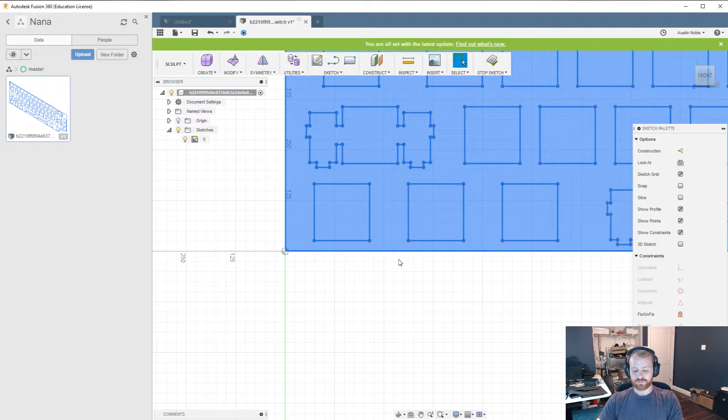One of the shortcuts I use a lot is pressing the S button, which lets you search for things. I'm going to use sketch scale. I already have everything selected that I want to scale, and then you just have to choose a point to base as your reference for the scale. We'll do 0.1 since everything was 10 times too big.

And we have a plate, so I'm just going to select that, copy, and go to my other design. Paste—those are just Control-C and Control-V in Fusion 360. At this point, I'm going to clean up the stab cutouts because they look like ass.

So usually I end up just drawing a rectangle around the cutouts that are already defined. Oh, I messed the other one up. All right. And then I delete the old geometry—don't need it anymore.

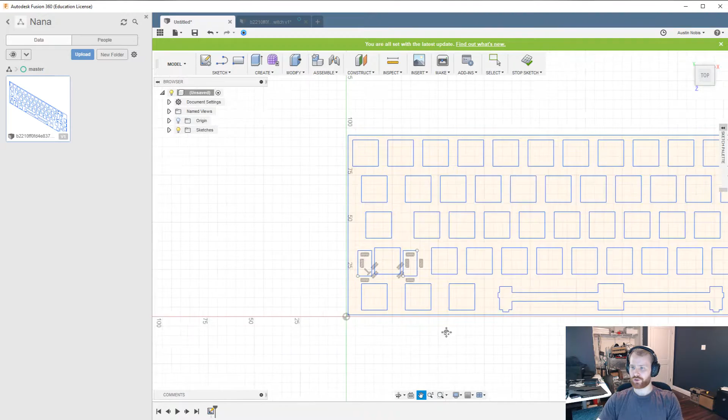Alright, so we've done one of the 2U stabs. Instead of doing the circles again over and over, I just delete the old stabs, make a nice box, and then I'm going to select these two.

Alright, so now we just need to move these stabs over to where they actually go. Keyboards are built on a 19.05 grid. So if we do 19.05 times—I can't remember how many keys exactly it is away—12, so just move it over until eventually you'll know. All right, so 12.75 units to the right, and then up we go 19.05 units up. And there we go, we have the stab cutout here.

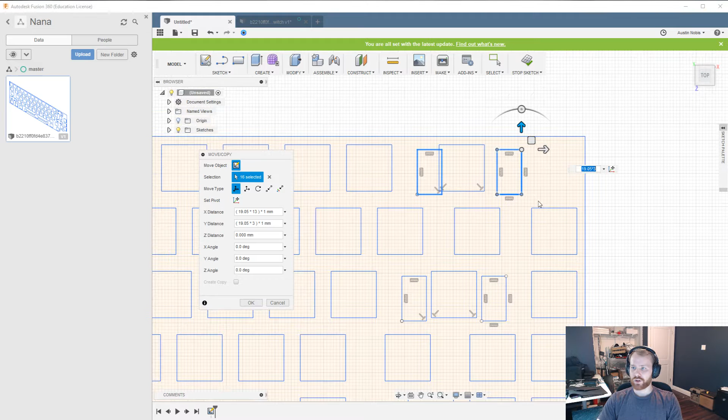All right, so now we have that stab. The next thing we want to do is add the switch cutouts for the split backspace.

So we'll copy paste and then we'll move one that way, and then the other one goes this way. And then I normally like to clean this up, so you just delete all the geometry you don't need. There, there, and then we just close it. Oh, missed one.

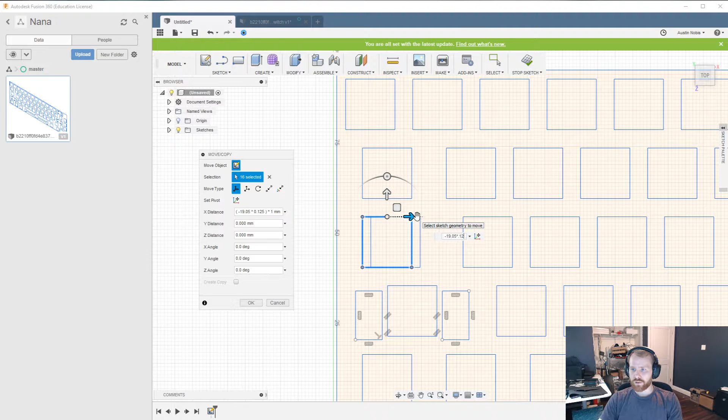So I'm pretty sure—go negative, and then there's the cutout for that. We'll delete the extra geometry again. What's up, Tonka Tonk? Just doing stepped caps lock right now.

All right, and then the last thing we'll do is we'll do the stab cutouts for the 7U spacebar. A little different from the other ones—we're gonna flip these upside down, so I'll show how I do that. Again, we'll just do the box outline, delete the extra stuff that we don't need, close off this box.

All right, so now we want to flip these upside down. For this, I usually use the mirror. So I select the geometry that I want to mirror—oh, let me close this stab actually. All right, so we'll do the mirror, we'll select, and then we'll select our mirror, which is the middle of the switch, to flip the stab upside down. And then we'll delete the old stab.

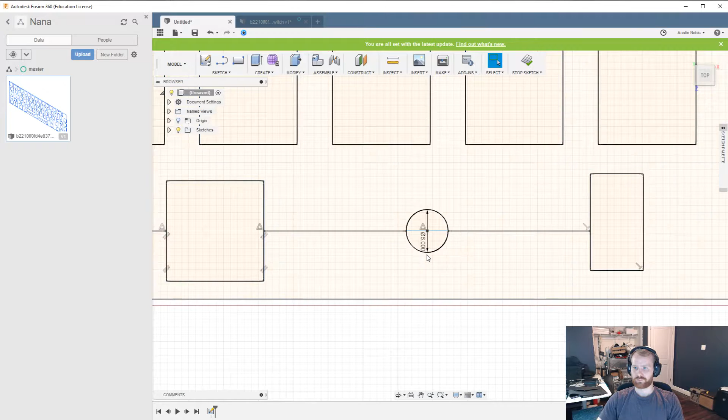Create a line again, and we're going to do the mirror again. So we'll select this, do the mirror, select the line for the mirror, and then that'll be duplicated across. All right, so this is going to be our plate.

So in between the edge of the case and the edge of the switches, all the switches are on a 19.05 grid, as I said earlier. So if you do an offset of minus 2.525 - I guess they changed that in the latest update - if you drag it this way and do 2.525, you'll see that it's in a perfect line with the edge of the switch plate generated by SwillKB.

So if you actually set the edge of your case to be on this line, you'll get a problem. You'll run into a problem when you get it manufactured where the edge of the keycaps will actually hit your case, which you don't want.

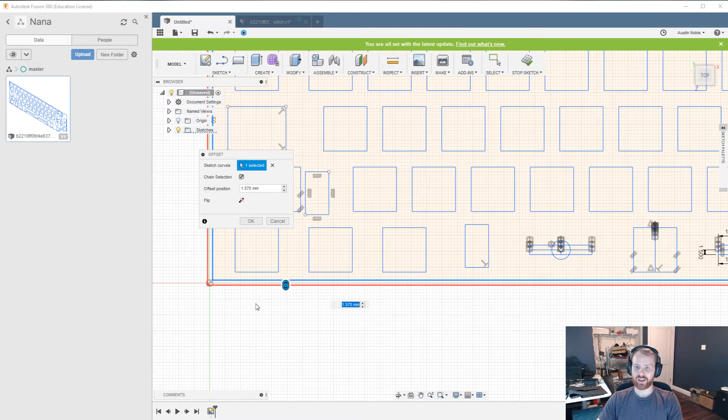So what I do is create some space using the offset tool. If you just press O, that's your offset. So you select that, and I do a 0.475. That's going to be the space between the keycap, like one switch unit, and the edge of the case. And then...

After that, we define the outside of our case. Bezel-wise, I usually do somewhere around 6 millimeters. So we'll do 6.475 - the 0.475 comes from the offset between the switch unit and the edge of the case. That'll give us a 6 millimeter bezel.

Another thing I need to add are the blockers for the switch. Like I showed you earlier with Q, which is this keyboard right here, there's a blocker here, there's a blocker down here, then there's a blocker over here. So we're going to replicate all of those in this drawing.

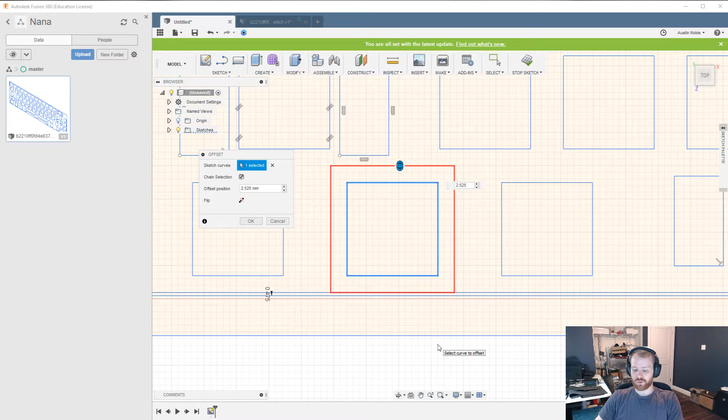All right, so to do that, like I said before, we're on a 19.05 by 19.05 grid. So we select the key that we want to block out, and then we go 2.525. Why 2.525 though? All right, so if we go to a calculator - we're on a 19.05 grid for each switch, so we do 19.05.

If you read the specification sheet for a Cherry MX switch - I'll just pull that up real quick, we'll reference this later too - and look at the size for a switch, it's 0.61 by 0.61, right? And if you go to the key switch metal frame cutout dimensions - metal frame meaning plate in this case - you have a 0.551. This is all in inches, so we need to convert to millimeters. So 0.551 inches to millimeters gives you basically 14 millimeters. So you're on a 19.05 grid, you have a 14 millimeter switch cutout.

Will you save this stream in your videos?

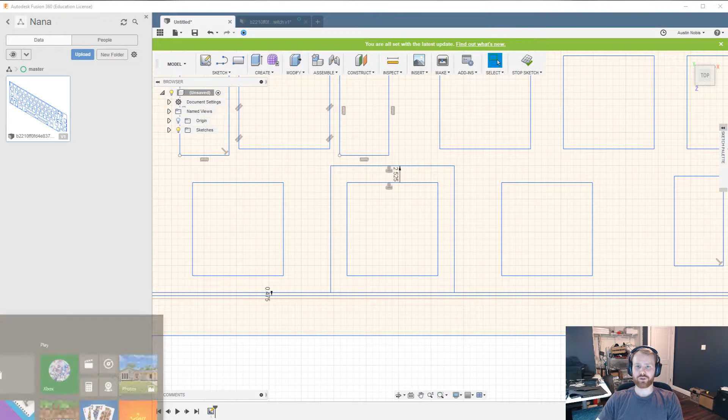Okay, so now we have that - that's one switch unit. Another dimension that we have is the size of a keycap. The size of a keycap is 18 millimeters. That's for a GMK keycap. I'm not sure about SA, and I think Enjoy PBT are actually a little bit smaller than GMK.

So if you do 18 minus 14 divided by 2, that's 2, right? So for my blocker, I want it to block the same exact size of a keycap, so I'll offset that by 2, which is this in here. And at this point, I'll delete the switch and that cutout, and then extend this blocker all the way down to the edge of the case, right?

So this is part of the case, this is part of the case. This right here is the space in between the edge of a switch unit and the edge of the case, so that your keycaps do not end up hitting your case. And then I'll just drag that down too. All right, so we have one blocker right here.

Next, we're going to do the blocker that goes in between your arrow key and your key just to the right of the spacebar. This will end up going exactly in the middle of these two, so it'll be centered off right here.

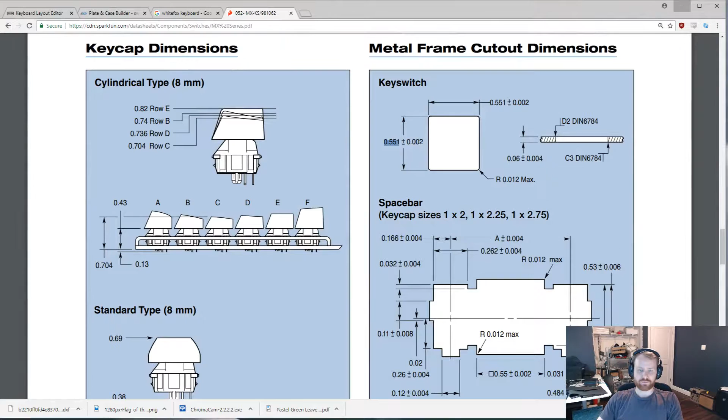If we look at the keyboard layout design we did earlier for the KLE layout, if you move this over 2, you know that it's 2 units, right?

A full unit is 19.05. So the size of this blocker is going to be 19.05 divided by 2, which is 9.525. And for the actual size, we want it to be the size of a keycap divided by 2, which is just 9. So the size of this blocker will be 9.

So starting at the center, we'll go up, and the height will be 18 for the size of a keycap. Just do a line straight up, 18. And then each way we'll go 9 divided by 2 that way, and we'll do 9 divided by 2 again that way, which is 4.5.

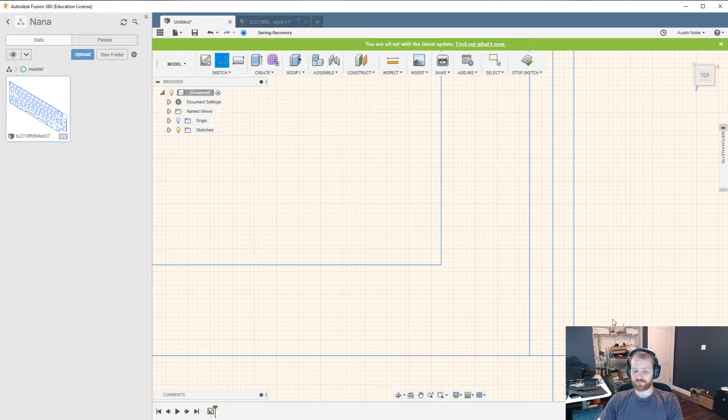And then the last thing we need to do is the blocker in the top right corner. So we'll do a copy paste. We'll go up 19.05 units for the size of a switch. We'll offset that by 2 because the size of our keycap is 18. We'll extend that to the case. And there we go. That is our plate.

I'm going to go in and delete these because they're confusing, and then just close this again. All right, so let's save.

And at this point, we can extrude. So usually the first two things that I extrude are the top of the case. So we'll select that, which is our outer bezel, and we'll select the blockers that we created.

Oh, so I made a mistake. I didn't extend this blocker all the way to the edge of the case, but we can fix that really quick. So we'll get this blocker for the top right, and then we'll get this last blocker right here.

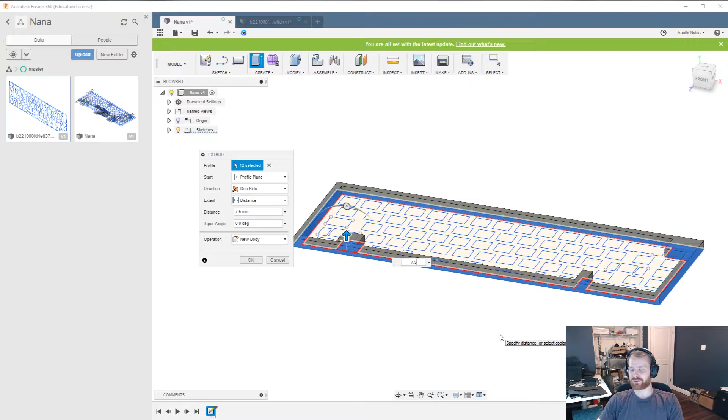So for the height of the top of the case, I like to do 7.5 millimeters. With 7 millimeters, you can kind of see under the keycaps. I don't really like seeing under the keycaps in my designs, so I go with 7.5 millimeters. That'll cover the bottom of the keycaps and give you a nice look, in my opinion.

Sometimes Fusion is really annoying, and for some reason there's some extremely small portion that doesn't extrude properly. One way to fix this is you go back in your history, scroll in, and find that little section that didn't extrude properly. You click on that and zoom back out. And there we go, we have the full top of the case.

So the next thing to do is to create the bottom of the case. I create a sketch from the side of the case right here, and then I just draw a giant square, like 50.

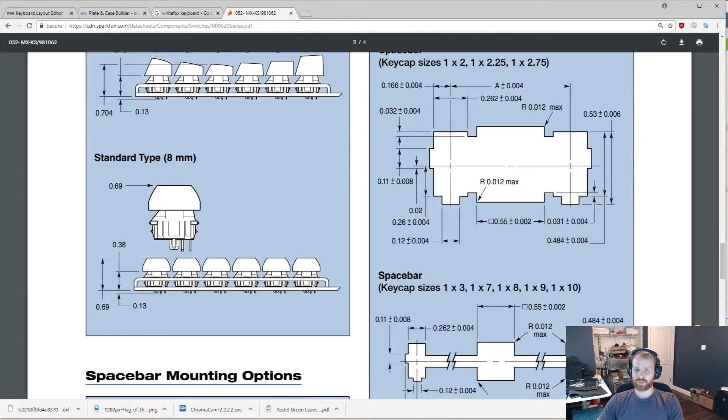And then you need to decide the amount of space that you need for the bottom of the case. To figure out how much space you need underneath the case, underneath this, right here, you have your plate. Your plate is usually 1.5 millimeters thick, or at least it will be in this design. So your plate's going to be 1.5 millimeters. And then underneath your plate, you can read the Cherry spec sheet and deduce how much space you need underneath your plate for the PCB, etc. So if you look here, you see from the top of your switch plate to the top of your PCB, you need 0.197 millimeters.

Or rather 0.197 inches. So 0.197 inches to millimeters. All right, Google. So that's 5 millimeters. And then what's the thickness of a PCB? Usually for keyboards, the thickness of a PCB is 1.6 millimeters. So 1.6 plus 5 is 6.6 millimeters.

But you'll notice if you've bought a PCB in the past that the little legs on the bottom of the switch - I don't know if you'll be able to see this, but it'll be easier if I just pull up what a switch looks like - these little legs, if you actually put those into a PCB, you'll notice they stick out a little bit from the bottom, so you need a little more space than just 6.6 millimeters.

So for safety, you could do something like 7 millimeters or something like that. So underneath, from the top of the plate, which is right here, you'll need about 7.5 millimeters or so. You can probably get away with 7 - I've done that in a few designs, but it gets a little tight, so I would recommend doing 7.5.

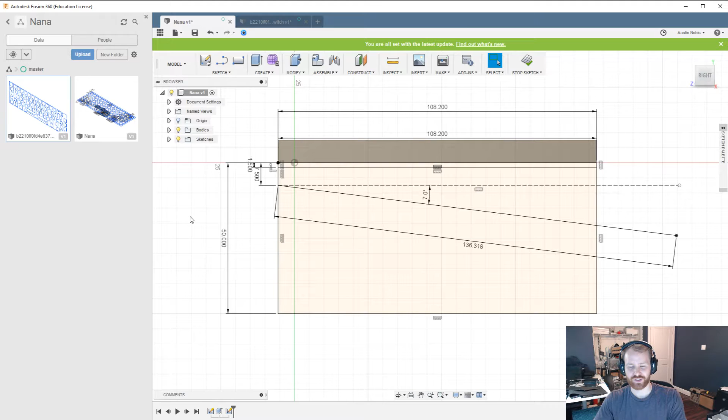Also, no, I'm not doing 11. The keyboard's called Nana, which means 7 in Japanese, so we will do 7. Yes. It's been decided.

So, something I'm going to change from the sketch I did earlier, or the first extrusion that created the top of the case, like this part. Something I didn't account for when creating this is that I want this keyboard design to actually be top mount, right? So the edges of the case need to go around the plate.

So to do that, we need to take our 7.5 millimeters, which will cover the bottom of the keycaps. So 7.5 from the top of the plate to the top of the case will cover the bottom of the keycaps, but what it won't cover is the plate. So the plate is another 1.5 millimeters, right? So you want the plate to sit somewhere in here, but you can't do just 1.5 millimeters, because you also want to cover the screws that screw the plate into the top of the case.

That'll make a little more sense later, but one thing you can do is go on Amazon and look at an M3 screw. Sorry, what are they called? A head cap. And we'll just do like 5 millimeters or something. And you'll see a screw like this, right? So just looking at this, a little piece of the screw is going to stick out.

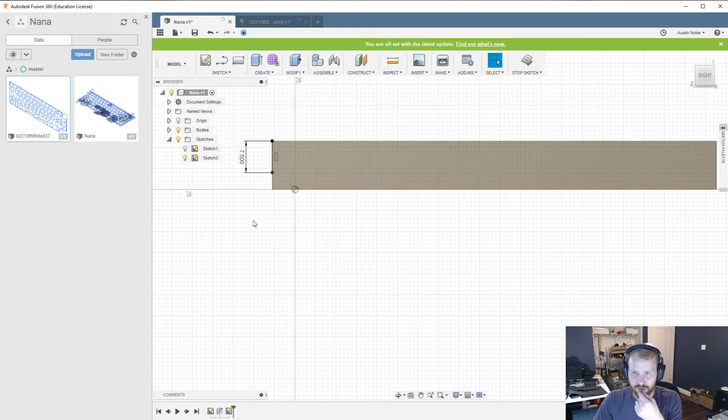All right, now we have that. We'll delete this sketch from earlier since it's in the wrong place. Now we can do the actual bottom of the case. If you remember earlier, we have the 7.5 for the top of the case, and then from here, we need another 7.5 millimeters, if you remember my talk earlier about the space you need for the PCB to fit underneath. And then from there, you can angle.

I said the angle would be 7 degrees. And then we just draw a line straight down, and there we go. So this is going to end up being the bottom of our case. Actually, one sec. So 7.5 is the space you need. Usually you want to make it a little bigger, because if you make it just 7.5, then the PCB will be flush with the bottom of the case and there won't be any space in between.

All right, so now we'll extrude that, and we'll just extrude it all the way. I used to use To Object a lot, but that doesn't seem to work anymore. It actually gets kind of annoying. So the lazy way is to just extrude it too far. We want it to be a new body, right?

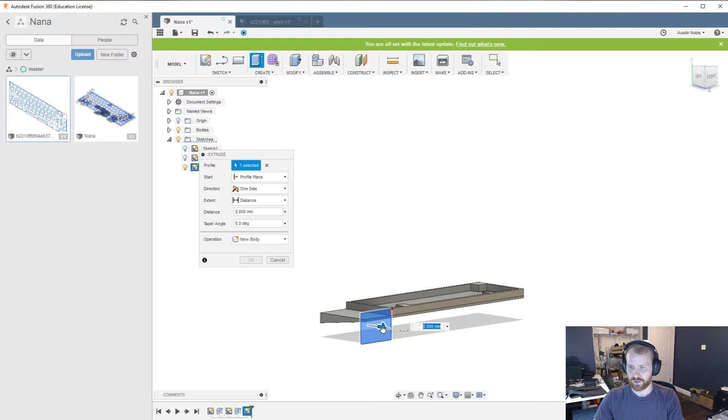And then we can just create a sketch on this face, do a rectangle, encapsulate this area, and just delete it. Boom. Nice. We have our beautiful boxy keyboard. It looks just like an X60. I mean, no, just kidding.

All right, so the next thing, Mr. Kim. Who's Mr. Kim?

The next thing we want to do is we want to cut out a chunk from the bottom of the case for the PCB to fit into, right? So we'll go to our bodies, we'll hide our top. I'm going to name these real quick. Gets a little easier when you start hiding things.

NK is streaming too? Damn, are we competing? Who has more viewers? I bet he has more viewers. I'm gonna go yell at him for stealing my stream time. Yeah, my beard's not really that trimmed, so I guess it's all right.

It's been better. Yeah, so getting back to it, let's make room in the bottom of the case.

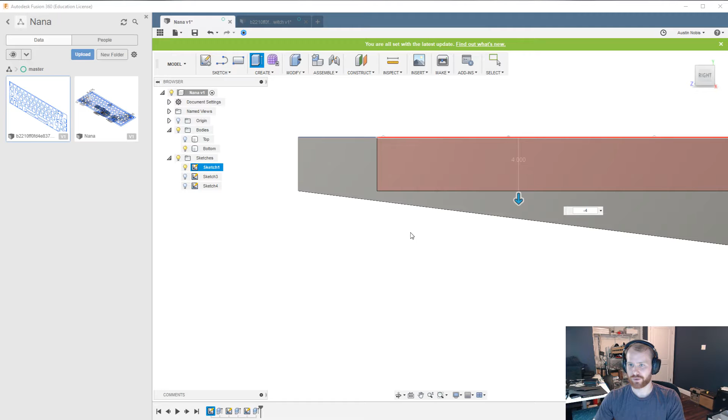So we'll extrude this way to cut space out. We obviously don't want to cut out the bottom of the case so we can't see anything. So we'll do a -4.5. That might be a little close. We'll do a -4. All right, so now we have a space cut out of the bottom of the case, and that's where the PCB will sit. Let's go clean up the top of our case.

Who's North Korea? I don't know. Who's South Korea?

So if you remember back to, well, you don't have to remember, I'll show you this sketch right here. So 7.5 is from the top of the plate to the top of the case. So basically from this point upward, we want to cut out of all the blockers so that the plate has somewhere to sit.

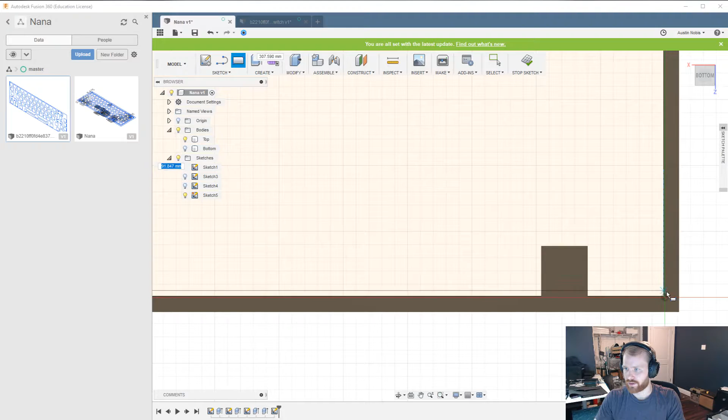All right, so let's go back to that sketch I just started, or didn't start. We'll create a sketch here. We'll create a rectangle that basically captures all of the blockers, right? So we want to remove everything but 7.5 millimeters. So if you measure this, you see 11.5 millimeters, and you want to cut out the 4 millimeters that are extra, right? So we'll do a -4, and we'll cut those away.

So basically our plate will sit up right here, and the PCB will sit underneath the plate. So if we measure this distance from here to here, we have 8 millimeters. Remember what I said earlier, you want somewhere around 7.5. If we want to make it exactly 7.5, we can just change that extrusion we did to cut out this chunk from the bottom of the case. So if you just double click on that in the timeline, I can just make it -3.5 instead of -4. And then if we do that measurement, there we go, 7.5 millimeters, exactly what we want.

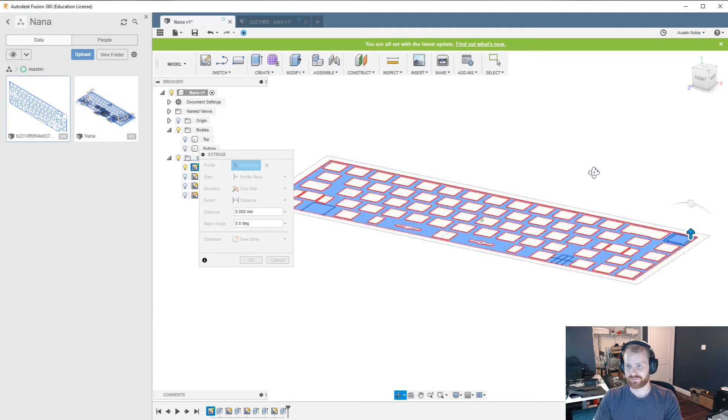All right, next let's create the plate. So we'll go back to our beginning sketch right here, and we'll just extrude all of this goodness for the plate. So our plate thickness is going to be 1.5 millimeters. Right now we have a little bit of space in between the plate and the blocker, 2.5. So what we can do is, let me rename this to plate real quick, and we'll just do a move. To move, you can just press M, and we'll just go up. What was it, 2.5? I think that was right. So yeah. Now you have your plate right up against the top of the case.

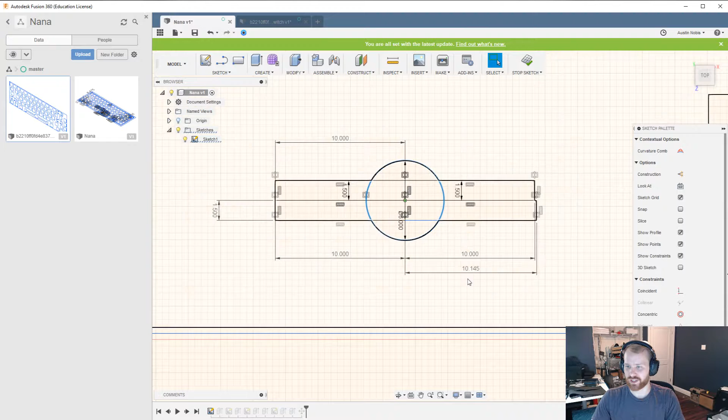Yeah, the relief cutouts are kind of ugly, so we can do a fillet. What happened there? That's hideous. All right. I'm gonna go back and fix this relief cutout because it looks terrible. I probably just messed up one of the dimensions, to be honest. So if I distance that, 10. Okay, this one is not 10. So I'll just change that to 10. What happened there was it actually pulled all the other geometry, which is kind of annoying. So what we can do is we can fix this circle. Then this is ground, it can't be moved by anything. And if we make that 10 again, it'll actually pull it in that way.

So we'll do the same thing over here and fix that shitty stab cutout. Actually, we don't have to fix it over here because the geometry was mirrored. So if I fix it on one side, it'll fix it on both sides. So we can just do stop sketch, and it will replay all of the history. If I go back and edit this sketch here, it'll redo all of these steps based off the change I made.

Who's kind of annoying, Amnesia? Mods. You're right, we should have a mod. Let's see. Zek. How do I make someone a mod? There you go. Zek, you're a mod. Good luck. Be a good boy.

Alright, let's fillet this. We'll fillet there. And there, and there, and there. There, and there.

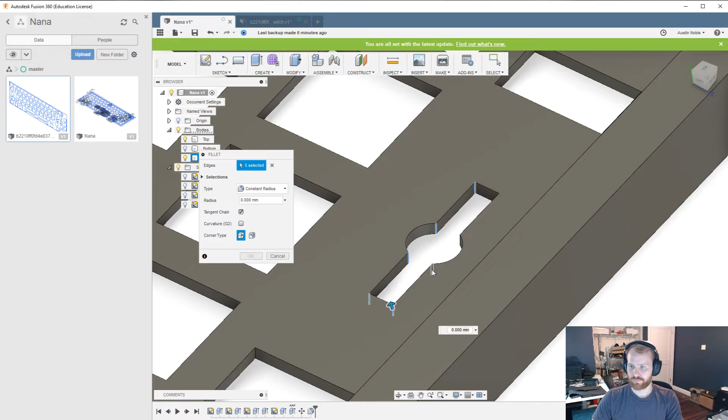And we'll fillet by 1. That looks kind of ugly. Bigger, 1.5, and you get a nice round relief cut. Yeah, I don't know. You can make them look however you want. It's not that big of a deal. And there we go. We have some nice corner relief cuts.

So another thing, oh, okay, I guess it didn't happen. So if you see this green point in the middle, that's your reference point for where you orbit. So if you set the orbit center over here, sometimes when you orbit, it doesn't orbit the way you think it will. So what you can do is just reset the orbit center, and it'll set it to the center of your geometry. All right, so let's go back.

So we have our relief cutouts. Let's make this thing less boxy. Fillet. So let's round the outer corners. This is really a preference. It's up to how you want to design it. So you could do 2 millimeters, you could do 4, you could do 6, you could do 8. It's really up to you. For this one, let's just do 4.

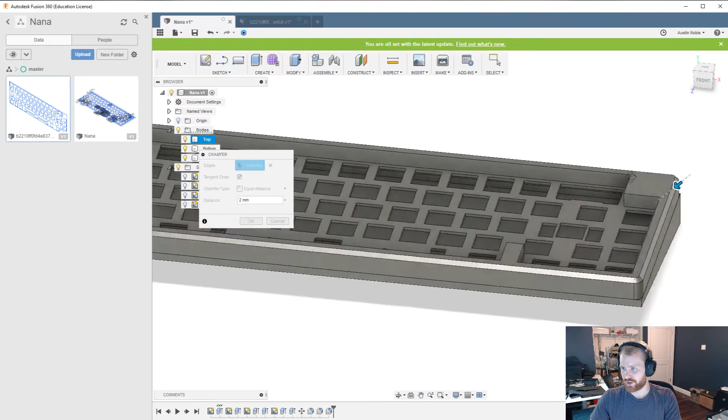And then another thing is chamfer. So once you round the corners, you can create a chamfer, and you just get that nice look. And you try and avoid having a lot of sharp corners on your design, right? So there you go. You have a chamfer, you have rounded corners. Now let's do the inside. So we'll do another fillet. We'll select where we want to fillet. There, there, there. Basically all the inside corners of the top of the case we will fillet. A few more to click, and I think that's all of them.

And then we'll do a chamfer on the inside, 0.5. So one thing that tells you if you've actually filleted all of your corners properly: if you do a chamfer, then it'll highlight the entire inside edge. And if it's all highlighted, that's how you know that all of your corners were filleted properly. So then we have 0.5.

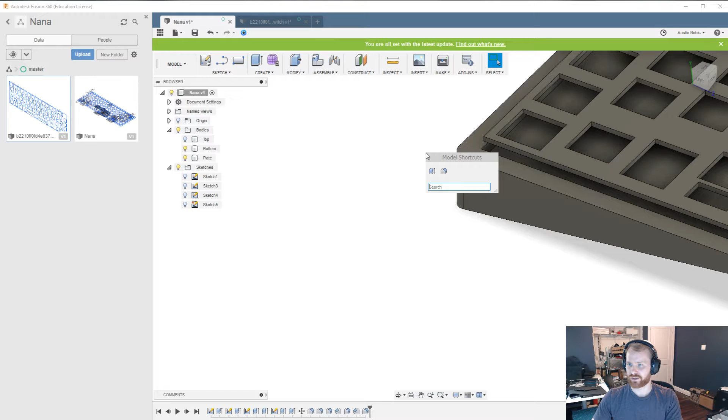And then obviously we want the rounded edges of the top of the case to match the bottom of the case. So we'll do the fillet again. And if you recall, those were also 4 millimeters. So we'll do the 4 millimeters and they line up. Great. So we rounded these inside corners on the top of the case. We'll also round those on the plate. So we'll do that fillet again. We'll go to the 4 corners of the plate. One millimeter, right? And then the last thing we need to do is the bottom.

All right, so now we're filleted all the way through and everything should be, yep, you can see it. And then this is the space between the plate and the edge of the case. Koala bottom. No koala bottom for this one. All right.

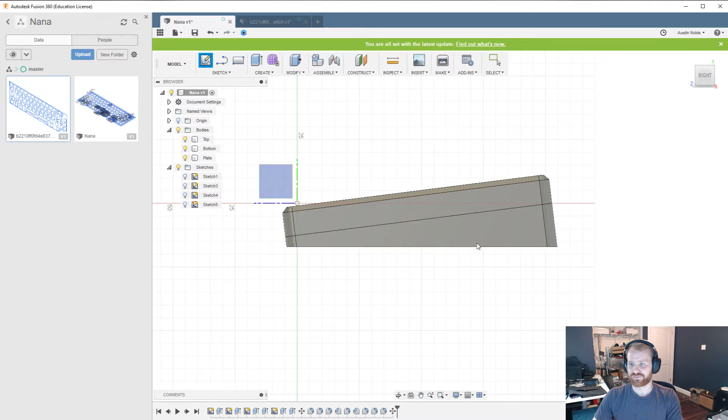So at this point, I'll design the bottom of the case. I guess this is a sneak peek since I haven't really told anyone how I'm going to design this for the Nana. So if you remember from earlier, the angle of our case was 7 degrees. So when I work on the bottom of the case, I like the bottom to be flat against the plane that I'm working off of. So I just rotate everything 7 degrees, like that. And then I'll sketch here.

So on this design, I think I'm going to cut in this way, so I'll just show you. But some data points I need to do this are this line right here. Because if I cut the case in this way, and I'll just show an example of what I don't want to happen. So if I offset this by 1, and we just go straight down, and I extrude this geometry, and we go in sideways like this. You don't want your case to look like this, right? You don't want that to happen. That looks like shit. Looks ridiculous.

So what you want to do is you take this reference point, which is the bottom of the inside of the case, and you go down, right? Let's go down like 0.5 millimeters or so.

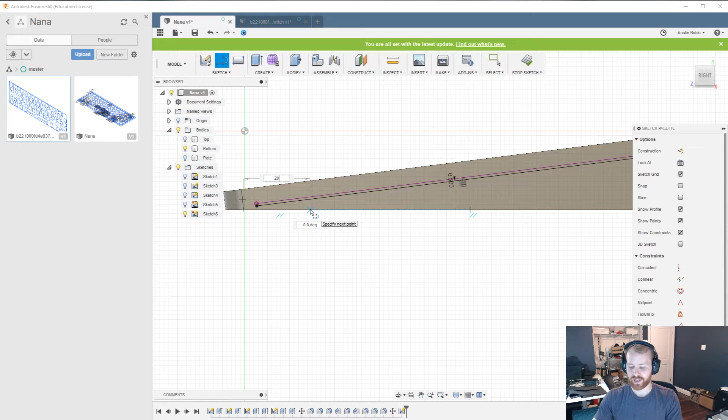So for this design, I want it to come in a bit this way, maybe like 20 millimeters. And then I just want it to go up and just follow the angle of the case. And the angle of the case is 7 degrees, right? So we'll just do 7.

So I know I made these filleted earlier, but they're kind of annoying when I'm trying to redesign the bottom of the case. So for now, I'm just going to delete them. So yeah, we have this portion that I want to cut out from the bottom. So I'm just going to extrude this in, let's say like -20, right?

And then another thing I want to do is I want to pull this in as well, right? So there's space here. That actually looks a little too big. I'm going to change that. Let's do 10. Yeah, 10 is good. So I want some space here, but I also want space here. So we'll do another sketch, we'll project this geometry, and then we'll just offset it.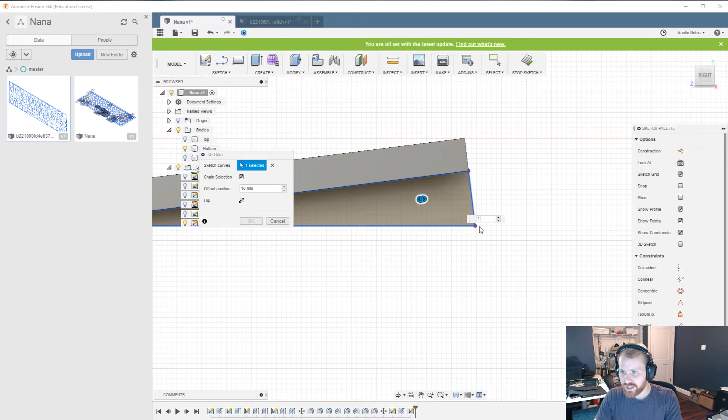Let's see, 10, no, 10's too far. I just want to offset this line. So to just offset the line, you can just click the line, and we'll offset that. We'll see how 5 looks. I think 5 should be good. And we'll just cut this one out all the way through, right? So now yeah.

I think it might look better if they both match. So we'll just make this 10, and if it looks ridiculous, we can always make the other one smaller and meet in the middle. Yeah, that's probably a little too big for my taste, so we'll just do 7.5. And then for this portion, we'll just go in 7.5. So then if you go look here, it should be 7.5 from both places. So if I go and do a sketch on this lip, and I go this way, it'll be 7.5. If I go this way, it'll be 7.5.

And my cat is meowing at me. Great.

So we'll create a sketch on the other side to do the cutout. We can actually copy the sketch we did earlier so we don't have to redraw it, and we can just extrude that, and we'll do another minus 7.5.

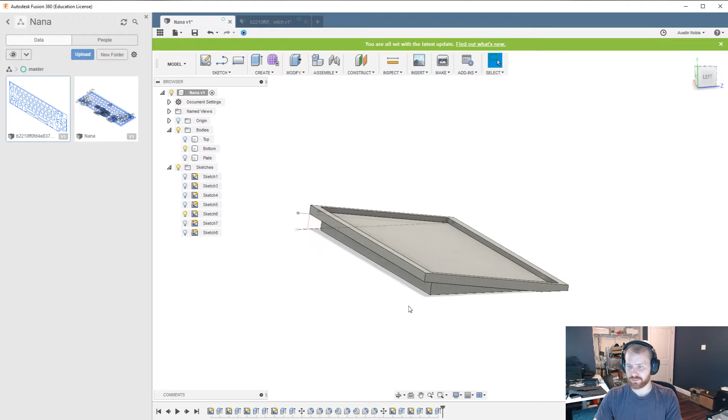That is a cat, not a human.

How thick is the space between the inside corner at the bottom and the inside corner in the tray? You mean the space from this point to this point? Is that what you're asking, Amnesia? Yeah? So that's 3.336 millimeters. No, it's pretty big.

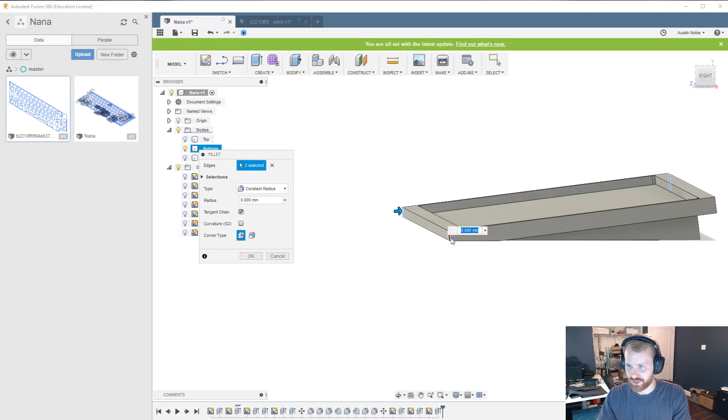Show cat. All right, I will show cat. This is cat. All right. I guess she wants to get out of the room. No, get out. All right, she's not gonna get out because my dog's waiting to attack her. All right. Let's go back to nice, good cat. The cat wanted to go outside the room until she saw that my dog was right outside the room waiting for her.

All right, so we'll do 4, 4, 4. Yeah, we'll do 4 for all of these. Like that. Look at the top. So I want to add some chamfers to this part. I'm just going to leave it at 1 for now. And I'll do a chamfer here as well.

Yeah, so if you want to mess around with colors, you just press A. I have some saved ones, so if you want like blue, just make the case blue. Yeah, but we're getting ahead of ourselves.

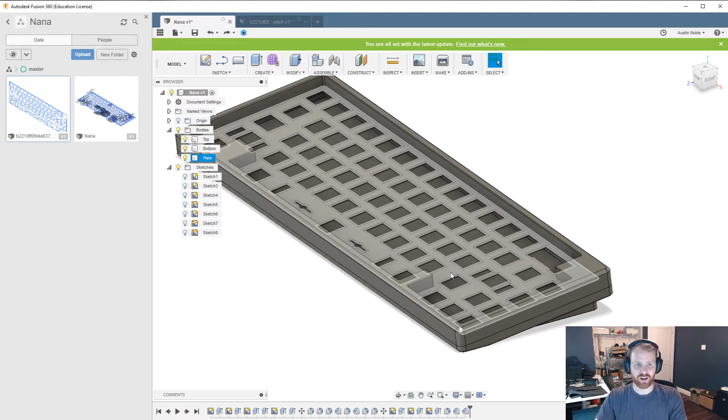45 minutes, I mean, we're not done. A few things left to do are, I started at, I think, 10:15, so it's been about 51 minutes. We have to do the mounting for the plate. We have to do the screw holes, so the top and the bottom mount together, and then I'm going to add a weight to this. I have a design in mind for the weight already, so yeah, let's do that next. So I'm going to undo this rounding because I want to do the weight design.

Who do I use to manufacture my cases? I use a Chinese company. I will not reveal their name.

Alright, so I'm gonna do a rectangle. Height will be 5, distance from here we'll do 10. So this is just weight design. It really doesn't affect any functionality of the case, it just makes it heavier.

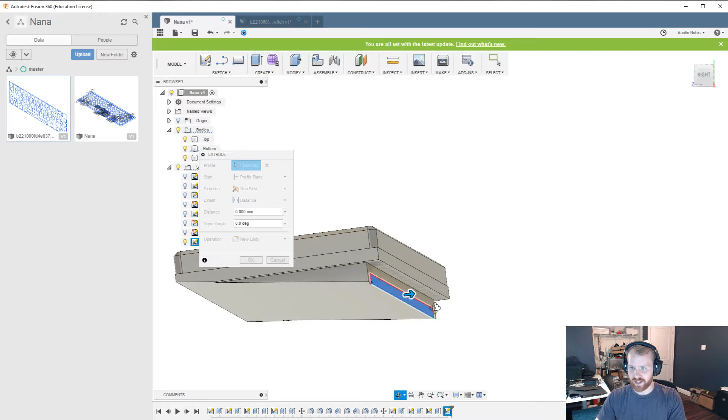So I have that, and I'm just gonna cut it out from the bottom. So instead of cutting... actually, I should do this a little differently to make it better.

So we're gonna do an offset plane. If we go to the origin, we'll show that, and we'll do an offset from here. So we'll go back about this far, and we'll do the sketch on this offset plane.

Alright, so I'm gonna project this square.

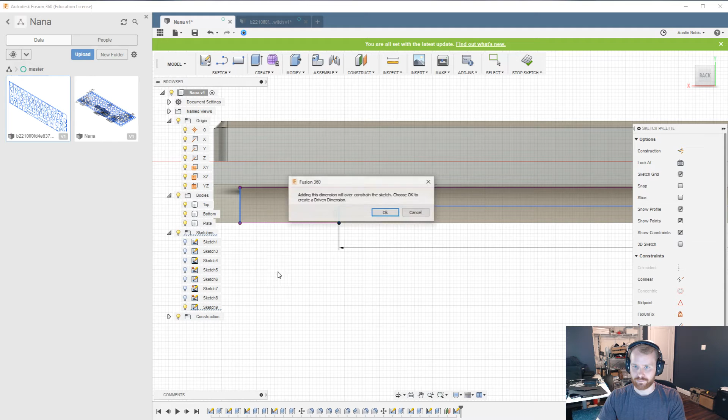So we'll do the 10 again, same here. What is this line? I don't want this line. I need to delete this dimension. Alright, now we can do it.

So let's just cut a chunk out of this. So instead of just cutting a chunk out, there's a feature you can use called intersect, which will create a part from the intersection of the two pieces. But if we do this, then we lose the bottom of our case—it's now just this bar piece, right?

So the first thing we want to do is stop the sketch and make a copy of the bottom. Reset orbit center. The first thing we'll do is hide this extra bottom, and we'll do a cut. I think I made that cut 45. So now we have the space cut out for the weight.

So now we can re-show this bottom and re-show this sketch, and we can do the same 45, except this time we'll do an intersect. And there we go—we have our weight and we have our bottom.

The new Clippy weight—I actually have not seen the new Clippy, so yes, maybe I am copying the new Clippy weight.

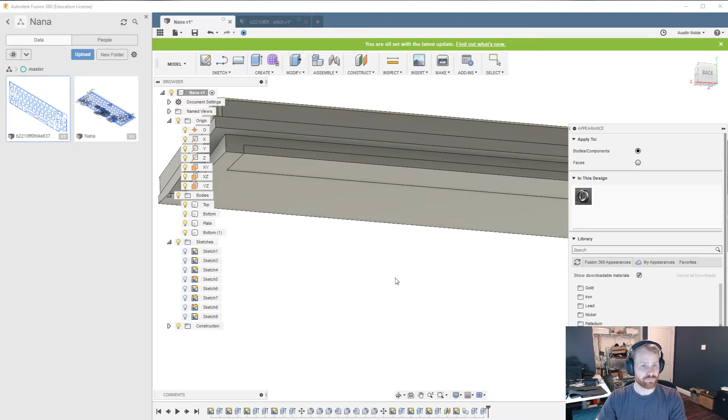So now we can re-add in all of our nice fillets, and we'll re-add the chamfers. I think I did 0.5, and then we'll chamfer this again, which was a 1.

Why did the fillet— I actually deleted the fillets earlier, Kana Joe. So when I went to do the weight design, I deleted the fillets, because I had a reference to the edge of the case. No, I didn't jump back in the timeline—I deleted them and then I remade them.

So to mount this weight to the case, there's 2 ways. One, okay, fucking cat.

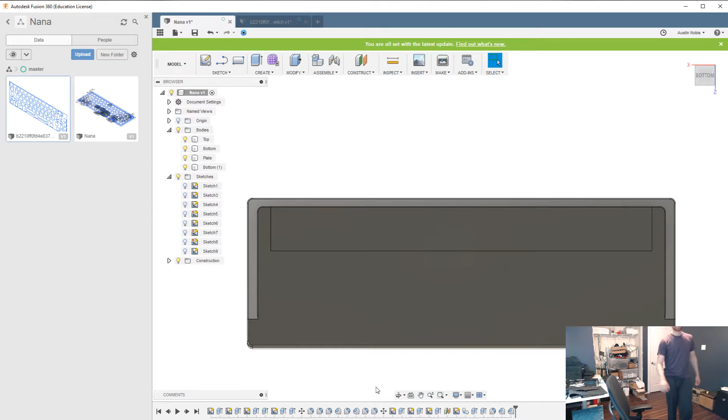Weight looks kind of small.

Yeah, so basically we can do the screws up through the bottom of the weight into the case, or we can do them down from the inside of the case into the weight. If we do it down, we can actually hide the screws so we don't see them from the outside, and the design will look, in my opinion, cleaner.

I guess people are saying that the weight is small. I don't know. Maybe I'll go back and make it bigger.

If you want to know how heavy something is going to be, we pretty much have all of the material, right? So the case is going to be pretty similar to 6061 aluminum. So if we just drag that material on, and then we drag on, I don't know, brass for the weight, and then we select it. Oh, forgot to do the plate.

We'll do that as brass as well. And we just do properties—we'll see that the total mass is 1.2 kilograms.

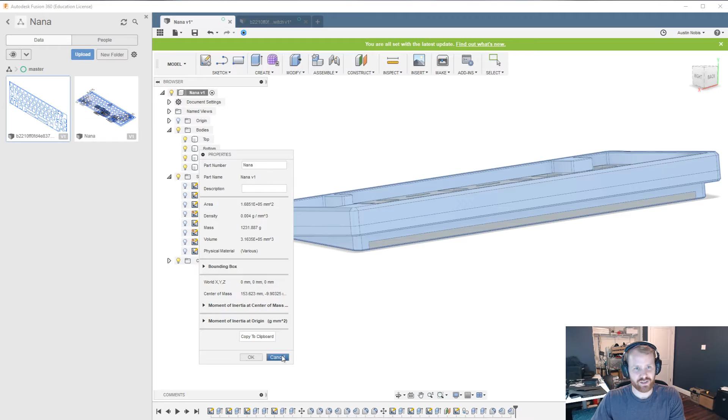I mean, it's not the heaviest case, it's not the lightest case. I don't know, I could go and make it heavier later if I wanted to, or I could leave it. It depends.

So yeah, we'll do the mounting for the weight now. I'm going to do it from the inside, and the screws are going to go down into the weight. So I want to see, when I do these screws—actually these names are confusing, let's rename that to weight. And then let's project that onto our sketch.

So this is where our weight is. We probably want the screws to go into the middle of it. And I like to use M4 screws.

So an M4 screw usually has an 8mm head for a countersunk screw. For those of you that don't know what a countersunk screw is, I can go to Amazon and search countersunk M4 screw.

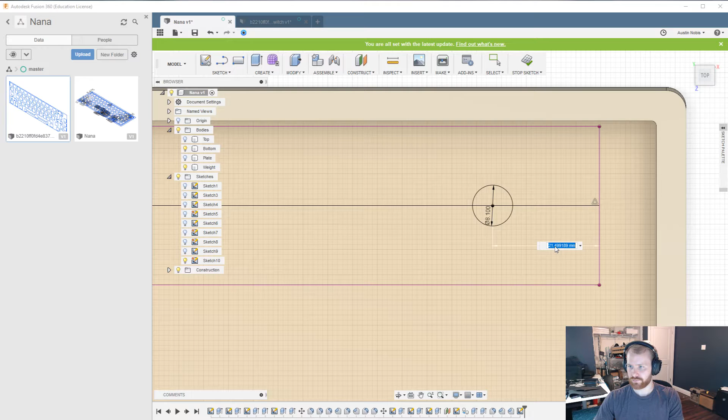Right, so this is a countersunk M4 screw. If you look at the specs, the head size is 8.1 millimeters, so I guess I can make this 8.1. And then usually I just use some set number distance, like increments of 5. 15 millimeters from the edge is probably good. Do another 8.1 millimeter screw, and we'll just put that in the same place. Since this weight is pretty small, as other people have mentioned, you probably don't need a screw in the middle. If you had a bigger weight, you might want a screw in the middle, but this will probably be fine.

All right, at this point we'll do a hole. We have a countersunk, so we'll select our 2 points for our countersunk screw. If you remember earlier, this is the depth of the screw, we'll adjust that in a bit. First we'll do the size, so this is 8.1, and then the size is M4, so 4 millimeters.

And then to get the depth, 10 is probably a little too deep, we'll do 9. Since most machine screws are flat on the bottom, you can leave it flat or leave it pointed like this. If it gets a little close to the edge like this, you might want to make this 180 and just make it flat, and then put like an 8mm screw in there or something. But yeah, we'll just go with that for now.

So you can see in here, this is the weight. If you do a measure on this, it's about 3 millimeters, so that's definitely enough. And then we'll just use the thread tool to specify that's a thread. Fusion actually auto-detects the thread based on the diameter, so it knows it's an M4.

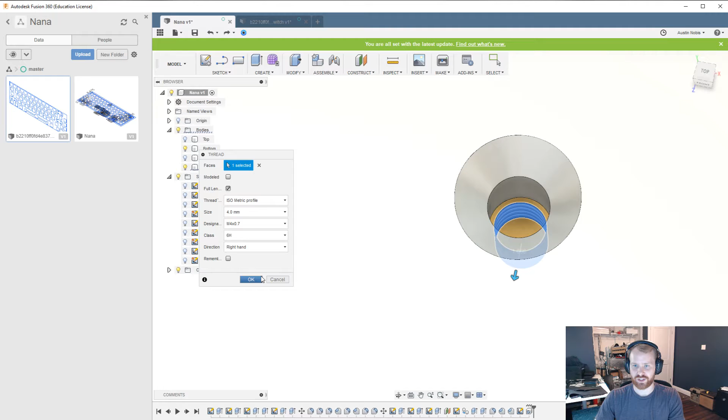So one thing you can do is right-click and drag up. If you right-click, it goes into this quick select menu, and you can repeat the last thing you did, so I'll just repeat the thread again. And that's how we will mount our weight into our case.

All right, I guess the next thing we can do is the screws to mount the top and the bottom of the case together. So let's hide the stuff we don't care about. To do the mounting, I usually don't like to have my case at an angle, so you can either delete that angle from before, but sometimes that messes some things up. So another thing you can do is just select everything, move, and rotate it back 7 degrees. So we'll hide the weight, we'll hide the plate.

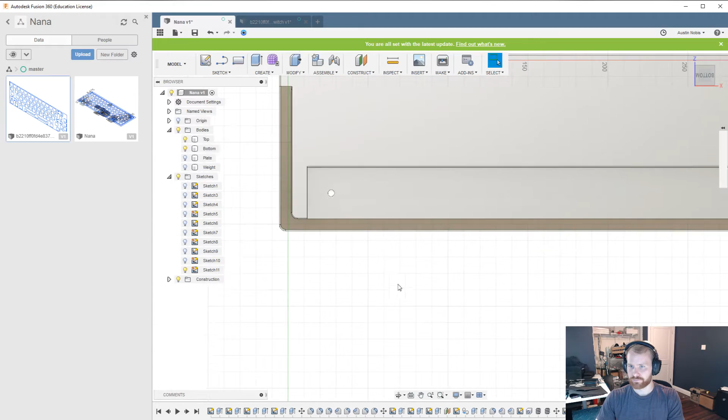And then we'll just do a sketch on here. Instead of doing a sketch right on it, usually I do an offset plane again, I use offset planes quite a bit. I'll just go like 20 millimeters off, and we'll do a sketch on here. So this plate, this plane, is parallel with the plane of this portion of the case, so we want our screws to go basically straight down this way. If you do the screws off this plane right here, they'll kind of go in at like a weird angle, and it doesn't really make sense.

So we'll project this geometry. I'm going to be doing M3 screws, the screw type I looked at earlier, which was the socket head cap screws. So I'll just do a head cap M3 screw. I usually like to get uxcell screws, so we'll just use them as a reference.

So if we look, let's see if I can find the head size. I don't think it's 5, I think that's too small. There we go, 6. So it looks like the head size is 6 millimeters, so I'll make it a little bigger than that.

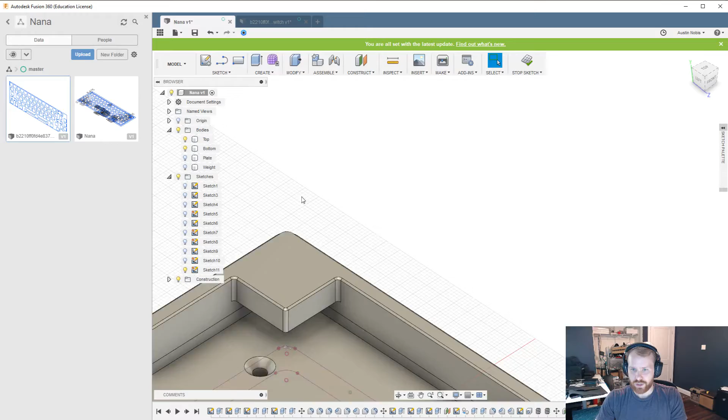So if you remember, this circle, this reference point, is based off the rounding of this edge, which is 4 millimeters. If we want the size of the edge of the case, we can project this edge right here, and we want our screws to sit basically in the middle of these 2 lines, so we want our screws to sit on this line.

So they can sit in the middle. Some problems you can run into, like if I'm doing a 6mm screw, then obviously you don't want that to be on this outside edge of the case, right? So we actually have more space down this way. So if we just offset this like a millimeter, the head of the screw only goes in a very small bit. So let's see if I can explain this well.

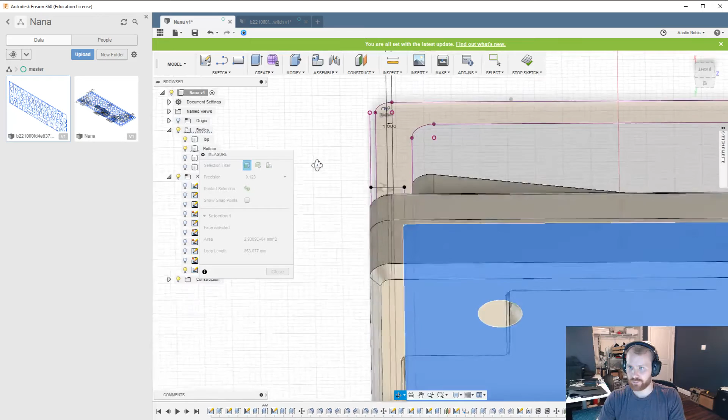So the head of the screw will only go a little bit into the bottom of the case. If you remember the design for the bottom of the case, where I cut this out, there's some space in between here and here, about 3mm. So we can make the head a little bigger and move it in a bit because there's a bunch of metal here. We can take the M3 thread that's only 3mm and offset it a little off center and everything will be fine. It might make more sense when I actually do it, it's a little hard to explain.

So I think I said I was going to do 6mm. Let's take this down a little more. Let's offset it. Actually, that might end up running into this, let me check. Yeah, okay, I'm going to move this up. There, so we should have space in every direction.

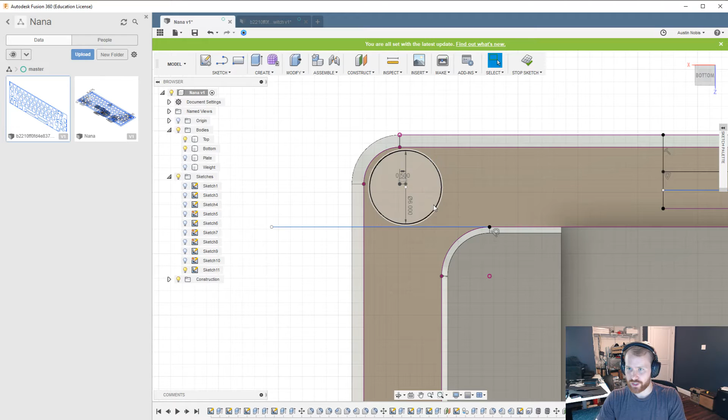Now I'm going to find the center of the case. Is that it? I guess that's it. And I'm just going to mirror the screw so it'll be in the exact same place on the other side.

And then I want to measure the distance between these two. 308.75. So we'll get out our calculator and divide by 3.

And then we'll do one more. And now we have our 4 screws.

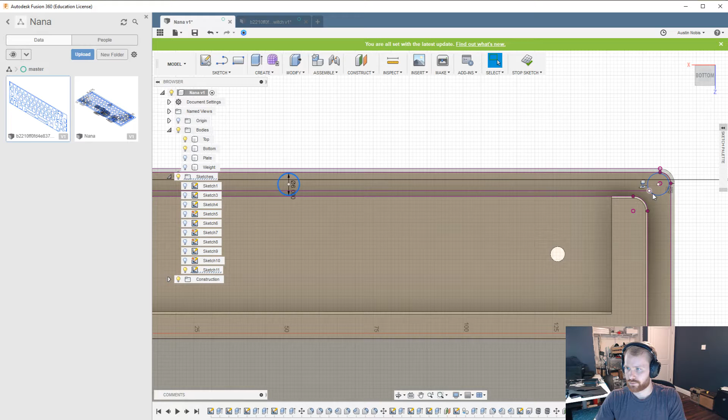The next thing we want to do is mirror them across the middle of the case this way. So we'll copy those 4, 1, 2, and we'll mirror. This is our mirror line. All right, that is definitely not the middle. All right, that'll work as our mirror line. So we'll grab all 4 of those, select our mirror line here, and there we go.

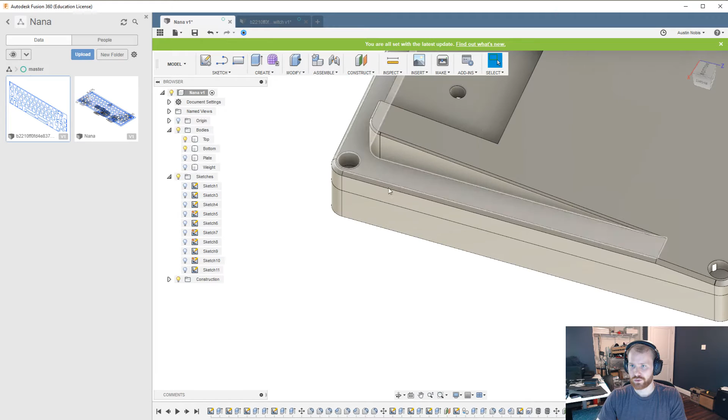So now we need to cut a chunk out of the case for the screws to sit in. Let's just do 25 for now. Alright, that's probably going to end up being too big. We're going to have to do the front and back screws separately.

And I might have to use M2 screws instead of M3 for this case design. That's pretty easy to change, we'll just change to 4 millimeters. Yep, smaller head size.

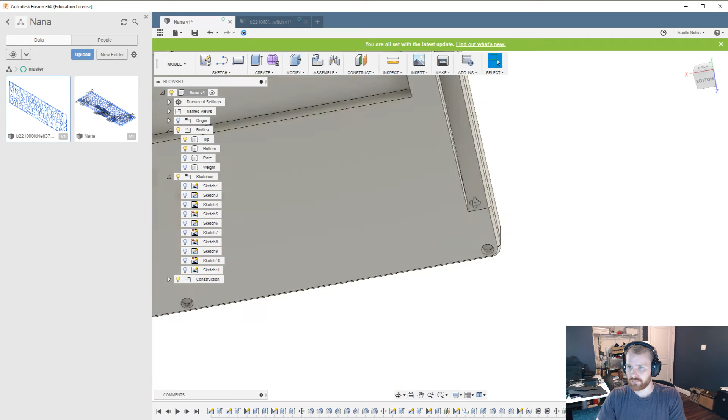And then I think they just need to be moved up a little bit. So I'll move all of these up 0.5, and then these ones are just mirrored, so we don't have to move them all. So if I stop the sketch, then we should see all of those, and it looks good.

Alright, so now we will do the threads. Or, yeah, we'll do the actual screws. So we'll just project those circles so we have a reference point for our hole action, and we'll run the hole command.

So this time we are doing M2 screws, so actually we already have the space for the cap of the screw, that'll just sit in there just fine. So we can actually just make the hole... yeah, one sec, let me reset the orbit center. All right, now we'll run the hole command.

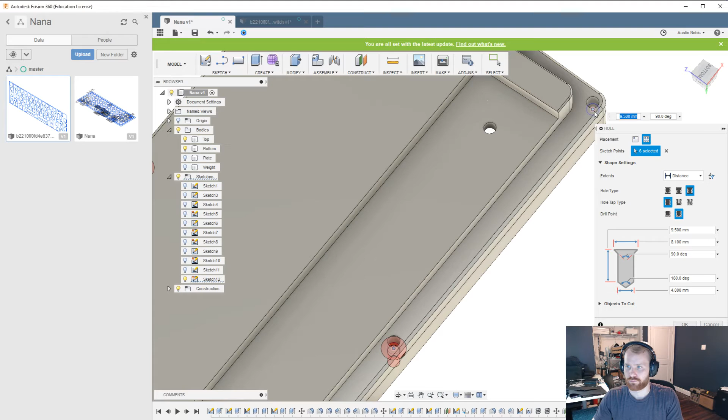Alright, and then we just need a simple one. This is an M2 screw, so we could just do 2 millimeters, and we just want it to go a good amount into the top of the case, so let's say 10. We'll do 11 so we can use screws that are 10 millimeters long. So then the head of the screw will sit in this space, and the thread will go all the way through here.

Let me see how big this is. So 2.7, so I can actually change this extrusion to be 24.5, and that'll just give us a little more space here.

So we'll thread all of these. You can only do one thread at a time for some reason. Maybe I'm wrong, but I don't know a way to select multiple holes to thread.

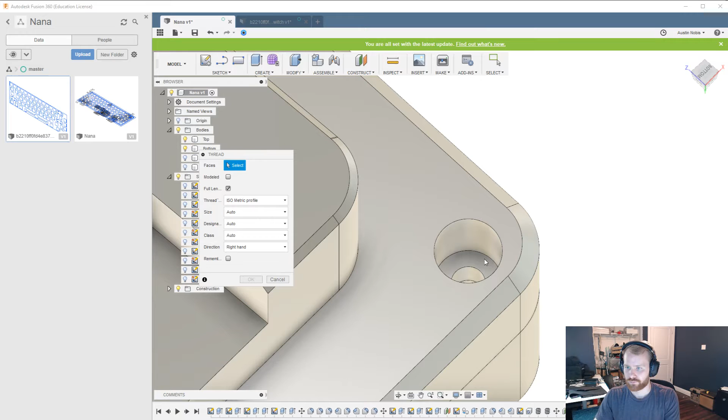All right, the next thing I'm going to do is make the cutouts for the bump-ons on the bottom. So I'll project this. Bump-ons need to be like 8.1 or 8 millimeters, so I'm just going to make it 5 millimeters from both edges. And then we'll do another 8 millimeter over here.

Again, it'll be - which edges did I do? Yeah, the outside, okay. So 5 millimeters and then 5 millimeters. So those are the two bump-on cutouts there.

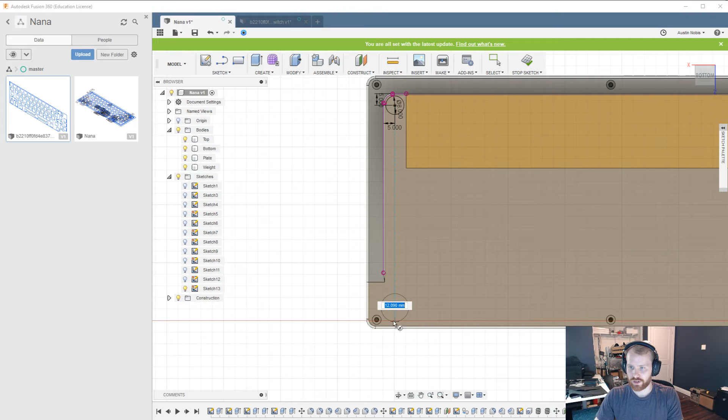And then I'm just going to put them in line, the ones down here, and again we'll do the 5 millimeters. So that's a little too close. Since this chamfer is a little thicker than this chamfer, we can just do 7.5 to keep it on the same scale. Actually, that looks a little silly, we'll do 6. We'll do 6.5, I think 6.5 looks good.

Right, now we can extrude the bump ons. Actually, you don't even need bump ons - you could just extrude it this way and have your keyboard on a little platform. No, just kidding.

We need to do a cut. There you go, and now you have a place to put your little bump ons, so your keyboard doesn't slide around. Then we'll just reset the orbit center again, because it gets out of whack sometimes.

You notice I have a lot of stuff in my history and it gets kind of hard to see things. So one thing you can do is group stuff. My mouse is messed up and keeps double clicking when I single click, but you can create a group - so there I just grouped all of the actions to create these holes.

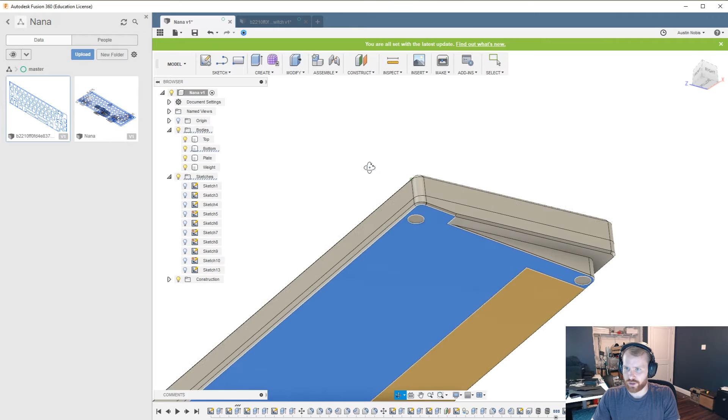If I suppress those features, you'll see that the holes I created disappeared, but nothing else changed. So we can unsuppress and the holes return. I don't know if there's a way to name groups, but it's just one way you can clean up your stuff.

So next, what should I do next? I guess I'll do the plate mounting.

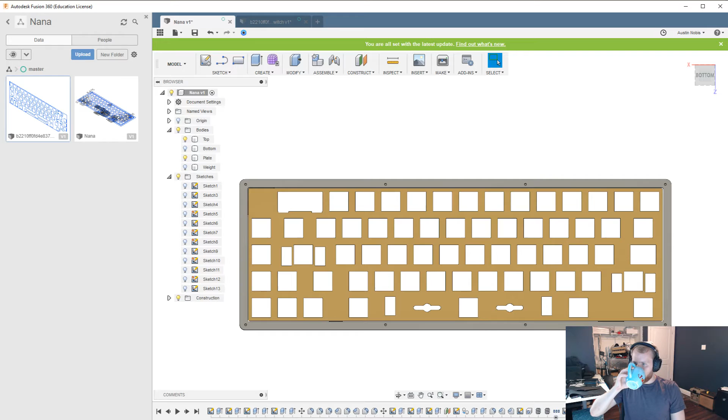Alright, let's do the... no, we're not doing a gasket mount. This is going to be a top mount. I'm not going to do a gasket mount on stream because I don't want to design it off the top of my head.

So I'm gonna center the mount on this switch cutout, right? There's going to be a mount centered on these set of switches.

For my mount, I'm going to use an M2 screw, which will have a 4mm head. The other thing you need to make sure of when doing your plate mount is you don't run into your screw mounts for the case, because you can't put 2 screws through one hole.

That's just not going to work out. Alright, so the head is going to be 4mm. And the distance from here, let's just do 3. So we'll do 2.5. Alright.

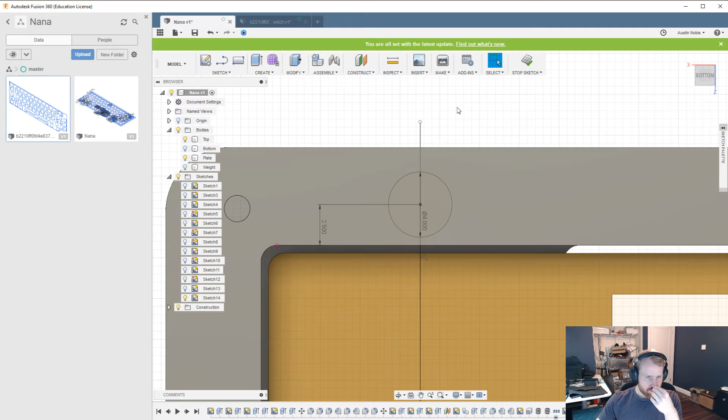Who's getting banned? Stop banning people.

Alright, now we need to create something to hold this screw, like a little piece of plate. So go 2.5, we'll go 2.5, and then we need to project the edge.

Right, so basically we're gonna have some chunk. I don't know why - where's the sketch plane? Oh, I see, I created it there. Alright, so the first thing I'm gonna do is just add this to the plate.

Like that, right? And then if you want it to not look terrible, you just fillet it like that. Or I could do like 2.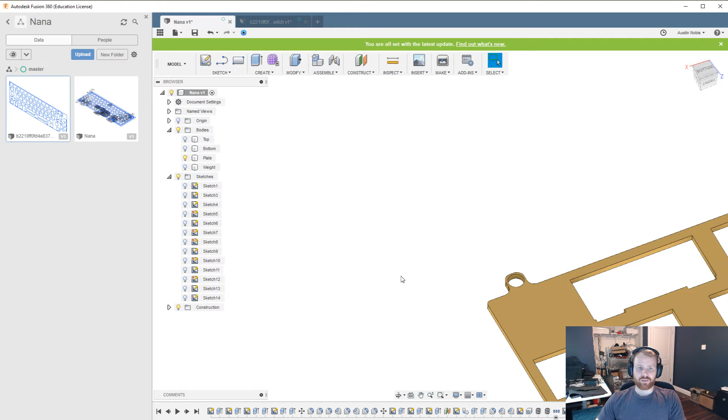Yeah, oh, so actually I think earlier I designed it so that I could have the hex cap screws sit in this area, so I can actually just make this a 2mm radius.

So that's just one. We need them, like, we need one here, here. I think I'll do 4. Yeah, I think I'll do 4 or 5. I think 4 is good.

Alright, so basically I need to go back to this sketch, and then I'm just gonna copy all of this geometry. 7 mounting points - actually, that would be interesting to have 7. Maybe I'll do that.

Wouldn't 5 cause issues with the USB? It would.

Let me just make sure. So 7.5. I need to do the distance and divide it by 3, I'm pretty sure.

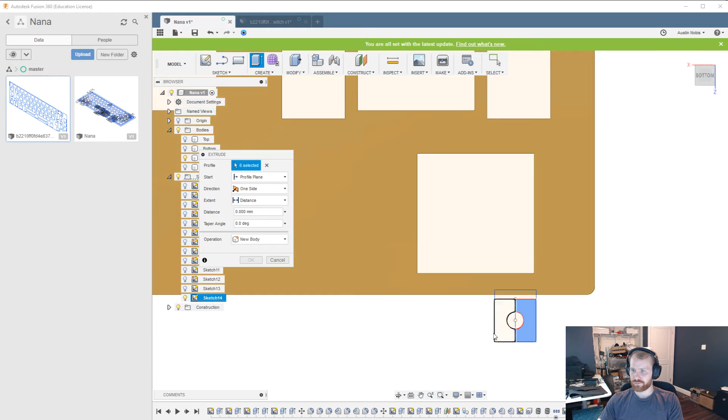Alright, so now we have our 7 mounting points. I'm just going to extrude all of those to add them. And then I'm going to fillet them all so that they don't look terrible.

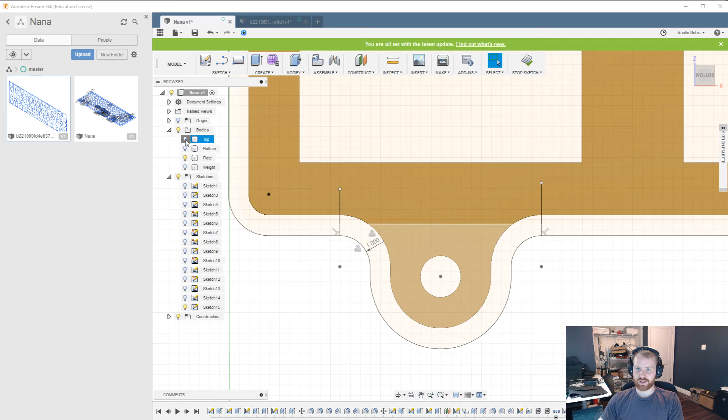Alright, so now we need to extrude this from the case. So we just offset the outside by, just do 1. And then just go straight down. So what this is going to end up looking like is if we take the top, we're just going to extrude basically this out. Okay, that's too big.

We're just going to extrude these, and then I need to make a line here. That. Except this part too. And it has to go both ways. Alright.

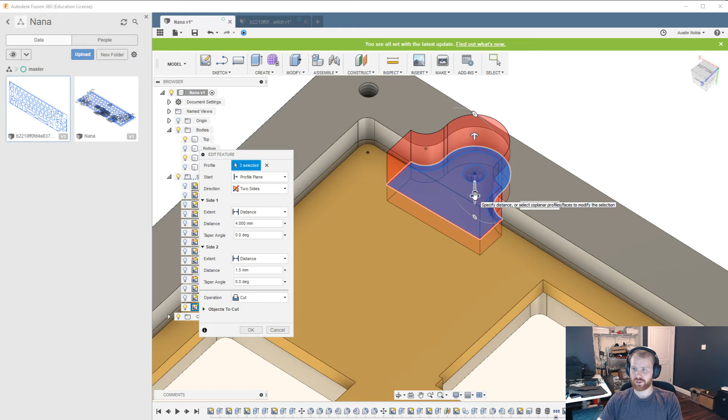Like that, right? But it needs to go up and it needs to go down. So what you can do is you can do 2 sides. The other way it needs to go, this way it needs to go 1.5 because that's the thickness of the plate. So yeah, if we hide the plate, we have a nice cutout. So basically we just need to repeat that for all of our cutouts. So yeah, we'll just do that real quick.

Yeah, so you can see as I get later into designing, as there's more and more pieces, Fusion 360 starts to lag. I don't know why. It's just bad software. My computer's actually pretty good. I have a Ryzen 7, so I think the 16 thread should be able to handle this program, and then I have a GTX 1070. It's not the hardware. Okay.

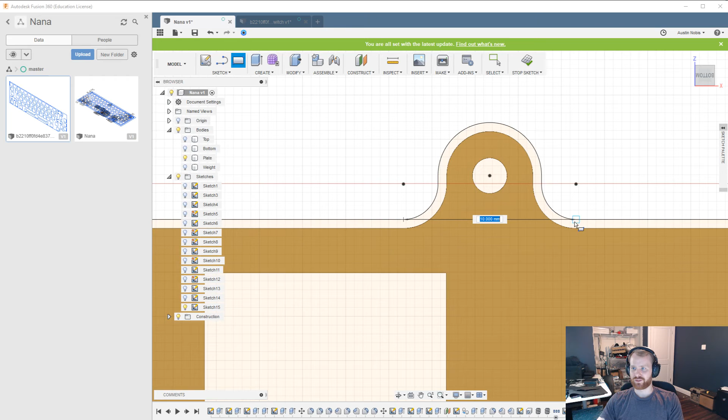The history. I don't know. I haven't seen the code, so I can't really say if it's the history or not. I see. Well, I really like the history feature, so I don't think I'm going to be turning it off, but you don't mean? Oh, I see. Just combining steps. I mean, yeah, I guess that's one way to do it.

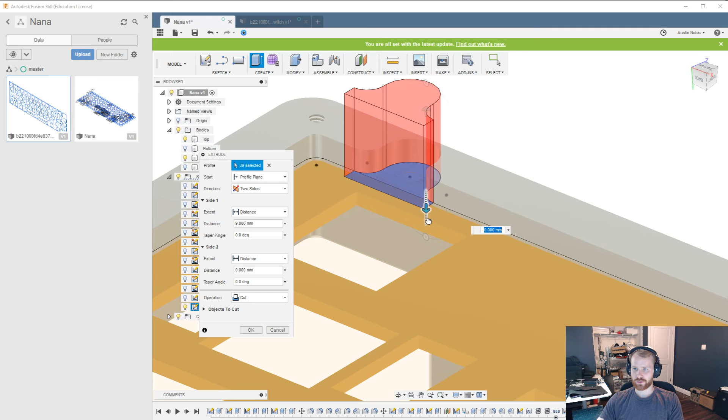Alright, let me just make sure I have everything that I need. And then we'll reshow the, and we'll cut this way, and we'll do the two sides, and then we'll go this way, 1.5. Oh, my bad. One sec. Let me redo that extrusion. But this time I am going to hide the plate, like I should have. And then there you go. You have plate mounting. Exciting.

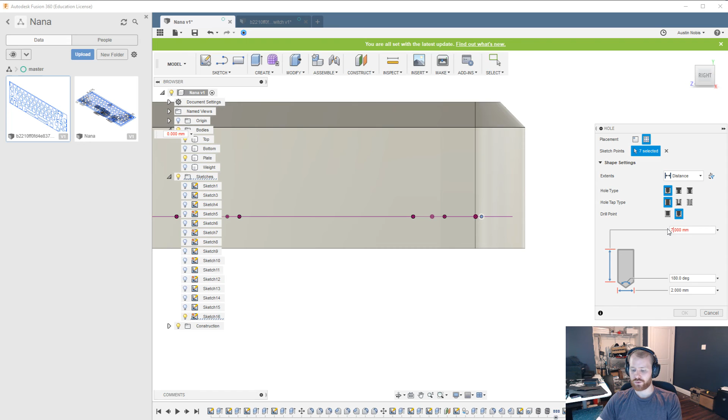All right, so I guess I need to make the holes for the screws to actually go in. So we'll just project that geometry. We'll select all the center points. And then we'll look from the edge to see how deep we should go. I think 8 would be good. We'll do 7.5. And yeah, you can thread these again.

Apparently I need to make them a little smaller because I'm getting too close to the case screws. I can go back and do that in a second. I thought I fixed that, but alright, let's find the sketch where I did the offset. Is it this one? No. I think it was this one. And then I just need to find that dimension. Just change that to 0.25.

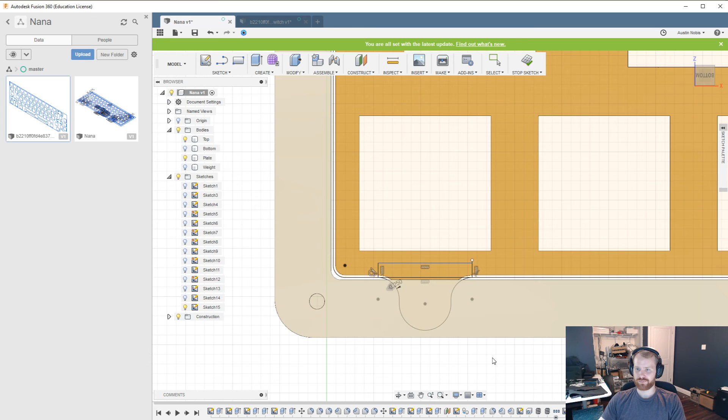And this is why I like having the history feature, because I can just go back to change something and then it will propagate. So I don't have to redo everything. So yeah, history is really nice for doing case design. So yeah, we have a keyboard. I guess I could do some renders. Set some materials, or set the appearance, do a matte brass.

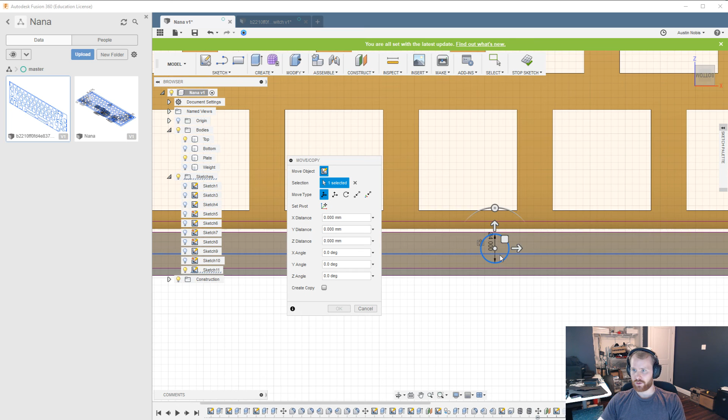And then, which top two screws? Oh, these holes? Yeah. I should probably move it at some point, but alright, that's pretty easy to do. Let's see. Alright, so I think I just need to move. Just move that one. And move that one. All right, all fixed.

And then we'll do, I like the texture of bead blasted aluminum, so I'll just put that in and then I'll change the Pantone. And then we can just do a render. Change some camera settings. So to make it more realistic and show the little line, we can just move the case up like 0.1 millimeters, and that'll give us the line between the top and the bottom.